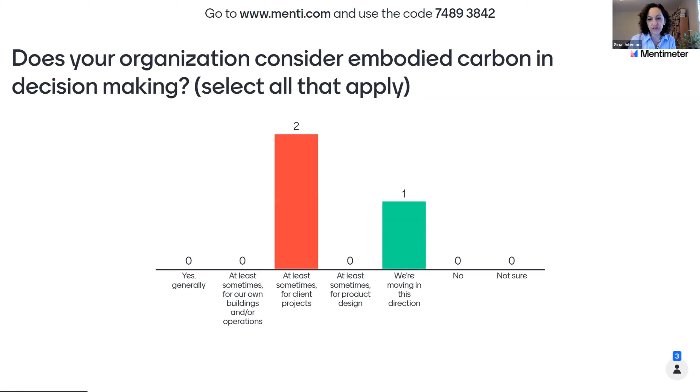So it looks like some of us are moving in this direction. Maybe some of you are in sectors where you have clients interested in doing this - really great to see that you're thinking about embodied carbon in these projects. Let's give a second for more responses. Thinking about it a little bit in your own buildings and operations. Not really thinking about it at all yet, maybe because of the nature of your organization, but we're hopefully going to give you more information to equip you today. That gives us a little bit of a sense.

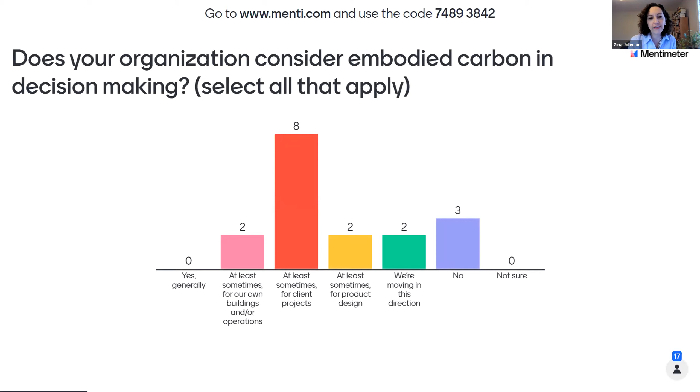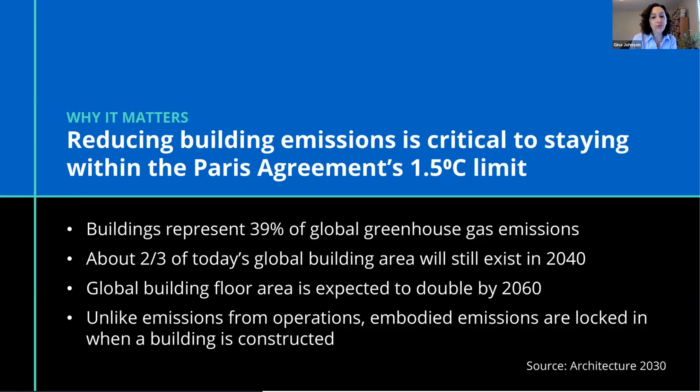Maybe they're working towards a science-based target or other carbon reduction goals, and so this embodied carbon discussion is central to that. We know low embodied carbon building is achievable through strategies like reuse, reduce, and sequester: reusing materials in buildings, reducing carbon through material optimization and specification of low carbon materials, and sequestering through the use of carbon sequestering materials.

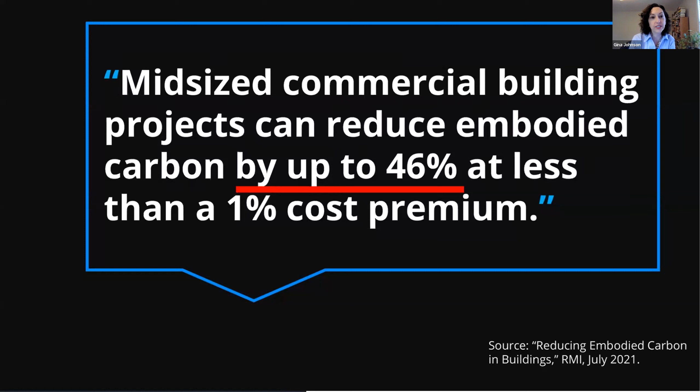A 2021 report by RMI demonstrated that we can reduce embodied carbon significantly at little to no additional upfront cost, using materials that are widely available today. RMI studied low cost and no cost strategies for reducing embodied carbon during the design and construction phases of three types of buildings, and found this finding.

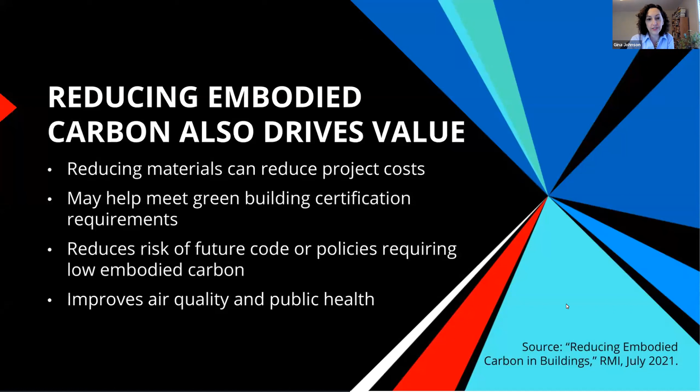Just last month, the White House announced a federal Buy Clean initiative. Many of you may have seen that. This aims to steer government funds for roads, bridges, buildings, military equipment, and other purchases toward low carbon products and materials. In doing so, the administration aims to reshape the market for these materials, driving innovation and investment in the private sector. This is a market that's already growing quickly.

The larger green building market is projected to reach $653 billion by 2028. And that's a compound annual growth rate of 10.5%.

Likewise, consumer product manufacturers see an opportunity for competitive advantage in reducing and labeling their products' carbon footprints. According to some recent consumer buying studies, adding a carbon label that showed a below average carbon footprint increased that product's sales, and by a lot if the product was also the cheapest. These studies showed that consumers were also willing to pay more for those products. In line with these findings, more companies are committing to carbon labeling. Companies like Logitech, Adidas, Panera, Allbirds, and Unilever, whose hundreds of brands include Dove soap, Lipton teas, and Ben & Jerry's, to name a few.

Businesses can also address embodied carbon by adopting corporate policies to complement existing carbon reduction strategies that they might have. In doing so, they signal to stakeholders that they're taking a comprehensive approach. Businesses that adopt embodied carbon policies are driving demand for lower carbon products, influencing supply chain practices, enhancing data monitoring and carbon reporting, and strengthening the transition to a decarbonized economy.

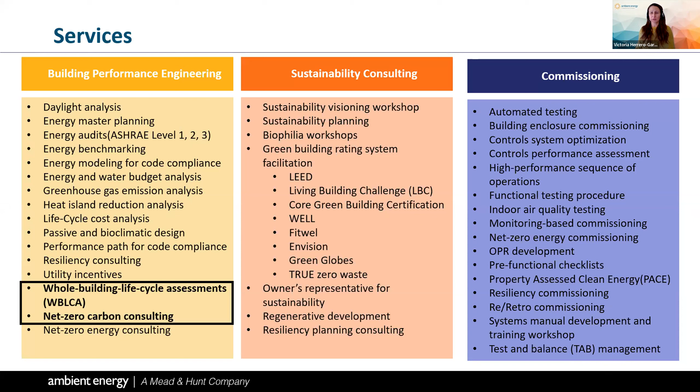Thank you very much, Beth. Hello, everyone. I'm going to cover some of what Gina already did with why embodied carbon is important, and then we will jump in like a little further conversation. Ambient Energy, the firm that I work for, is working towards a resilient and regenerative built world. And that is through education, collaboration, and all the different services that we provide. I have highlighted there the whole building life cycle assessment and the net zero carbon consulting, because that is the main purpose of this conversation today.

So what is the difference between operational carbon and embodied carbon? Many of you have heard throughout the years reductions in energy loads and operational carbon, and that happens when the building is already constructed. The embodied carbon differs from the operational carbon in the fact that every material used to construct that building is part of the embodied carbon of that building, and all the decision making happens beforehand. The embodied carbon will be there for life. It doesn't change after the operational carbon starts unless there are replacements.

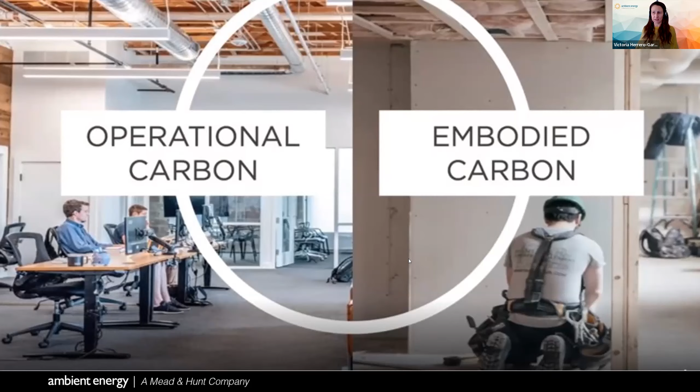Kind of like a little graphic of what embodied carbon entails, as Gina mentioned, is from extraction to the end of life of any product used in construction or in day-to-day life. My part of the presentation and Greg's will be more towards the built environment, but Jim will bring that perspective to the holistic embodied carbon world.

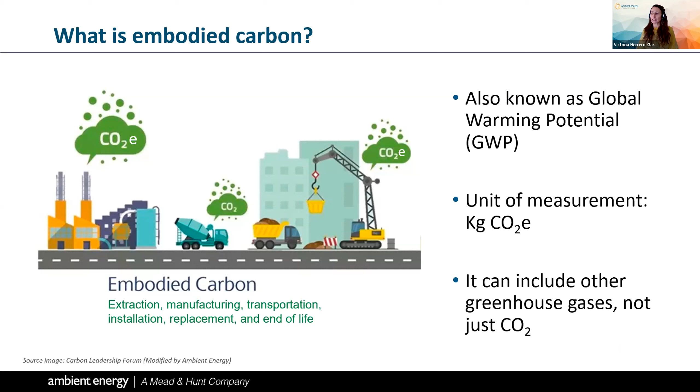The embodied carbon is also known as global warming potential. The unit of measure is kilograms of CO2 equivalent, and it can include other greenhouse gases, not just CO2.

Why is it important? This graph shows the breakdown of global emissions by sector. And if you can see, just building materials and other building manufacturing accounts for 21%. But when we also add up the rest of the manufacturing that is not related to buildings, we're counting 43%. It's not half, but it's close to half of what we consume and use on a daily basis.

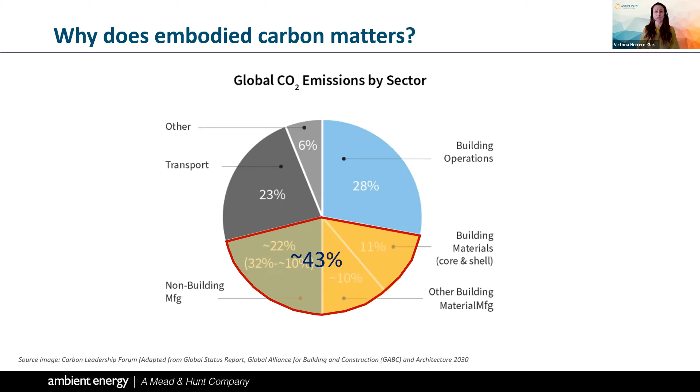As Gina mentioned as well, by 2060 it's estimated that the world is going to be building approximately one New York City each month. That is for the next 38 years and 9 months, 465 New York Cities.

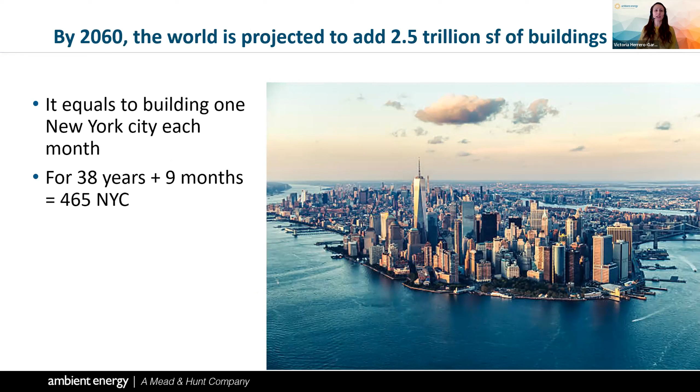The difference between operating versus embodied carbon, and why it's important, is that if we do a building as usual, normally operational carbon will be the biggest chunk of that pie, and embodied carbon will be the smallest. But as we go towards a high performance building and the electrification of the grid, embodied carbon starts to play a big role.

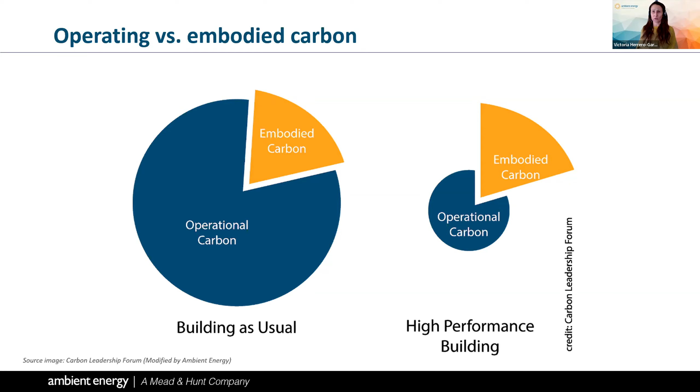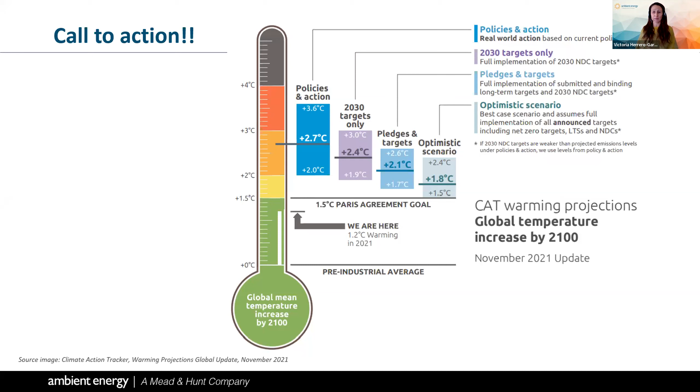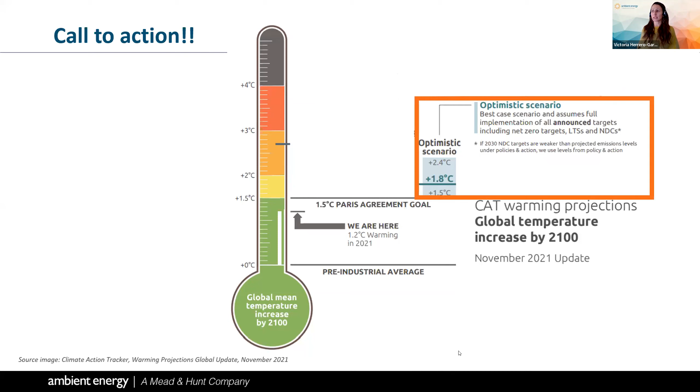Also related to climate change, and how we are tracking for not exceeding the Paris Agreement goal. This graph has a lot of information - you can read more of that in the Climate Action Tracker report. But I want you to think about this: even with the most optimistic scenario, we need to make sure we are focusing our efforts on big target reductions in order to meet it. So how does embodied carbon policy play into this?

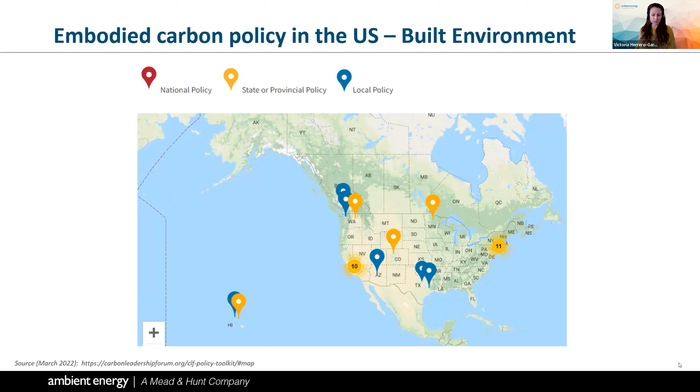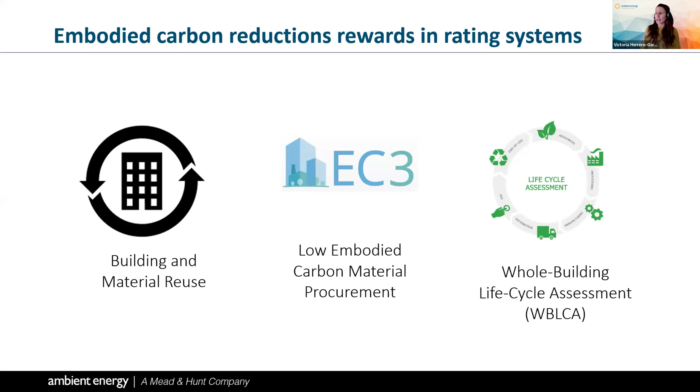There are a lot of state and local policies that are being created and developed every day. This is on the Carbon Leadership Forum's website - you can find more information about the policies there. Other people are motivated by rating systems, and they reward us for building and material reuse. Other credits and points are for low embodied carbon material procurement, and others for whole building life cycle assessment.

But how do we do this? We cannot reduce what we cannot measure, so we need to understand where the biggest impacts are in order to reduce them. There are two ways to measure the impacts: one is the procurement of low carbon materials, and the other is the whole building life cycle assessment.

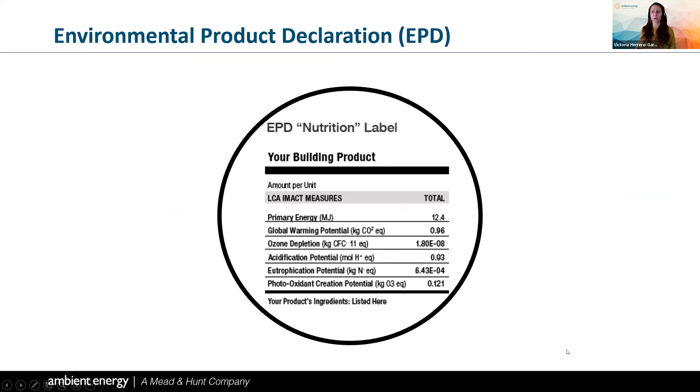With the procurement of low carbon materials - let me see where it doesn't pass - the first terminology we need to know is environmental product declarations. Jim is going to cover more of this in detail, but it's pretty much a nutritional label for our products. It gives us a lot of different parameters, but one we want to look at is the global warming potential, which is the embodied carbon of our product.

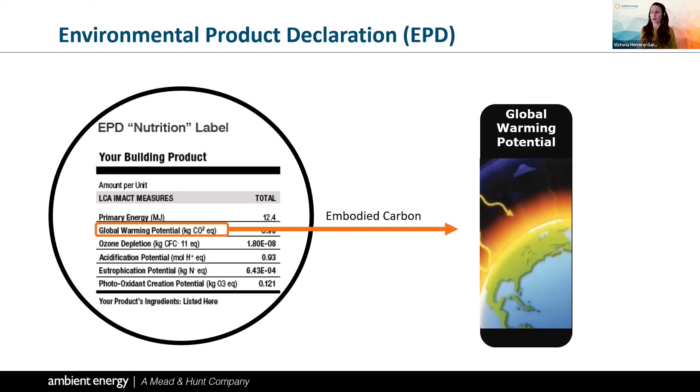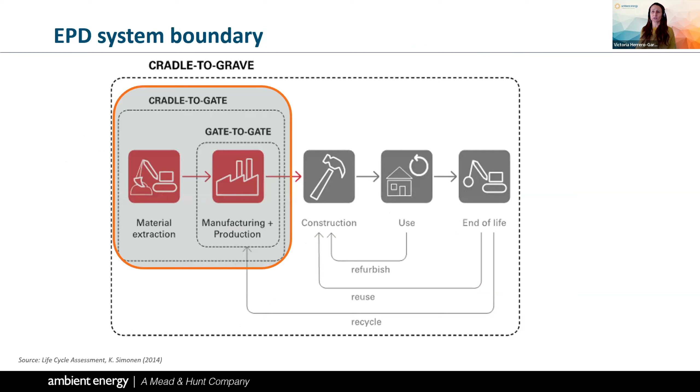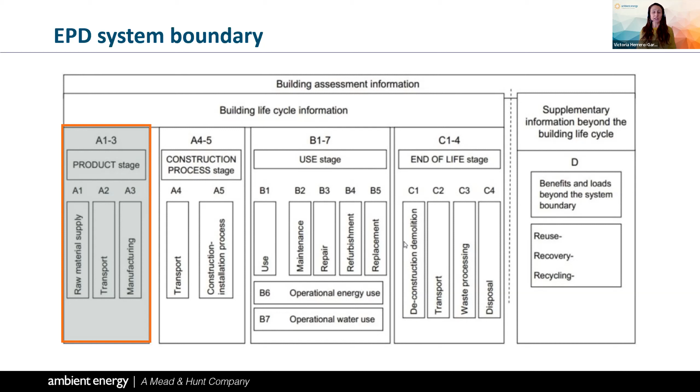Many of you have heard the system boundary, cradle to gate. That means from material extraction to manufacturing, to when it leaves the gate of your manufacturing process. Some of you might have also heard of life cycle stages - for the EPD it's normally A1 through A3. Some products might have other system boundaries and other life cycle stages included, but for the most part these are the ones. This is a graphic showing the life cycle stages, and for the EPD, again, it's modules A1 through A3.

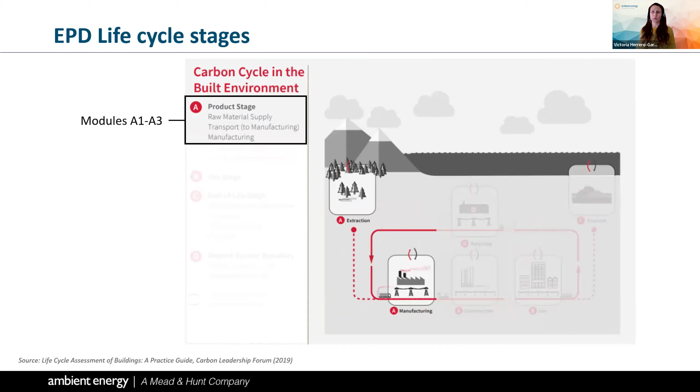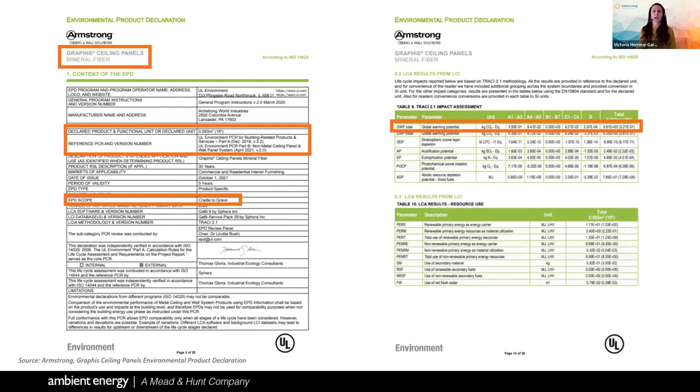This is an example of an EPD. It has a lot of information - the scope, the unit, the declared or functional unit, the global warming potential reporting. So it gets very challenging sometimes to compare and see which product is better than another.

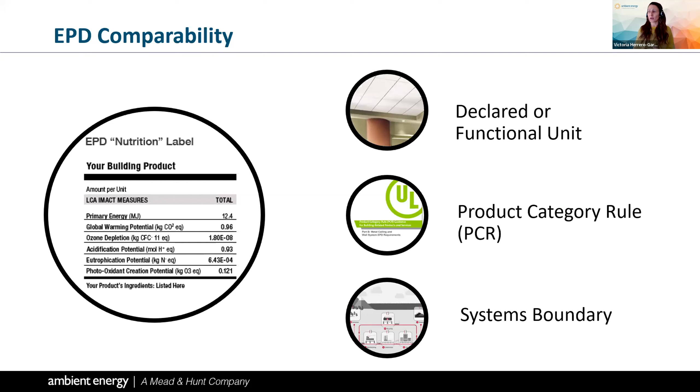The three things you normally need to look into to compare products: the same declared or functional unit, the same product category rule, and the same system boundary. To put it in an easy perspective, there are some free available tools out there that use the system boundary A1 through A3 and have done all this research for you.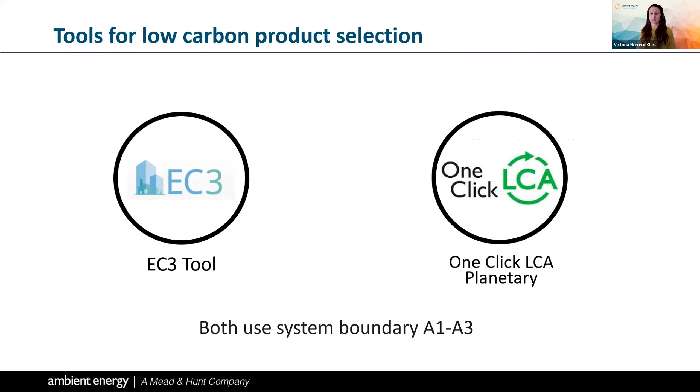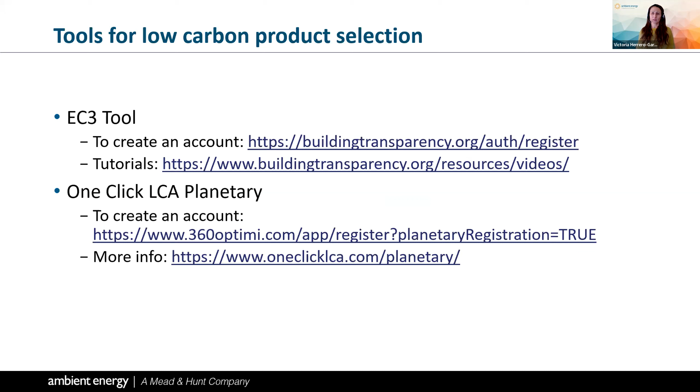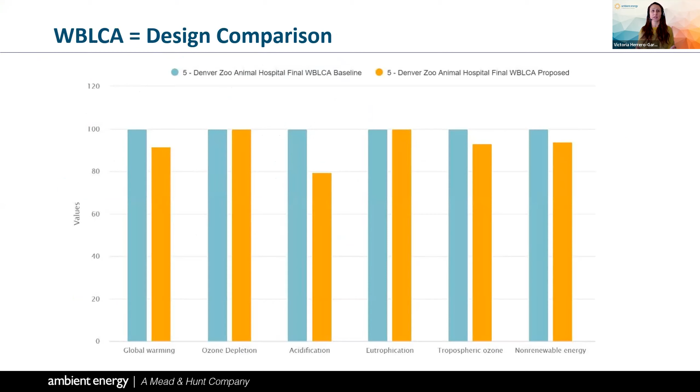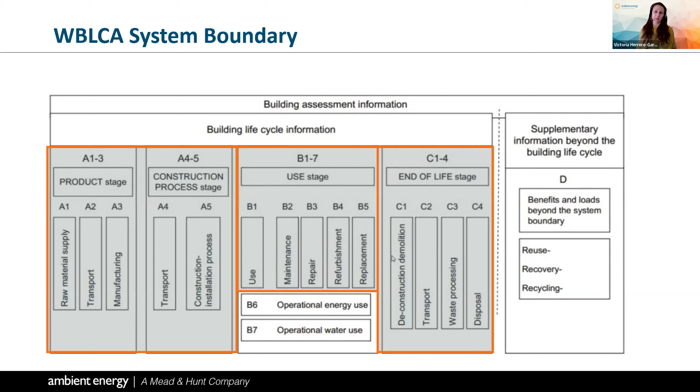And then the whole building life cycle assessment. This goes a little bit beyond the A1 to A3 stages and the system boundary. This is a comparison of a baseline against a proposed design case, and includes a system boundary that is cradle to grave, meaning life cycle stages A1 through C4, from material extraction to disposal.

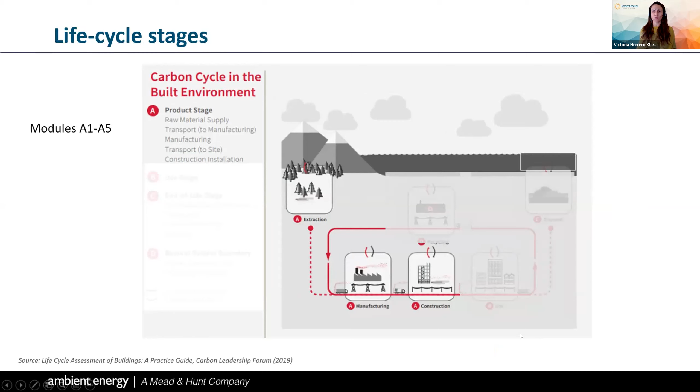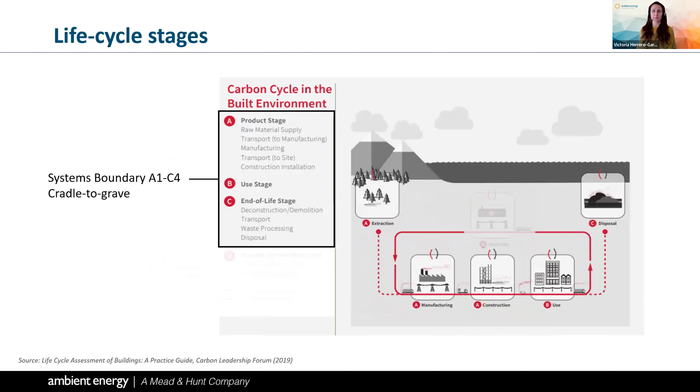The life cycle stages are here again: modules A1 through A5, which now includes transportation and construction installation, the use stage, and the end of life. So the system boundary is cradle to grave, A1 through C4.

And then Victoria, just a quick time check.

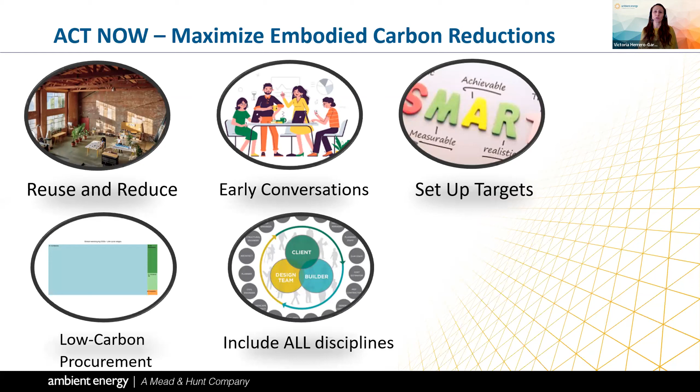You can take action to sign in for commitments. There's an Owner's Commitment specific to owners, Structural Engineers SE 2050, MEP 2040, the net zero carbon building commitments, and also a Contractor's Commitment Guide which includes different categories, with category one relating to embodied carbon: maximize embodied carbon reductions by reuse and reduce, early conversations, setting up targets, low carbon procurement, and including all disciplines in the conversations.

So just open your eyes, the tools are out there, just start the conversations as soon as you can. Thank you very much.

Great, thank you so much, Victoria. That was awesome. And we have some questions coming in, so we're going to wait for those when we convene the panel. But it seems like it's really generated some interest, so that's great. Thank you very much, great job.

We'll switch to Greg. Greg Kingsley is President and CEO of KL&A Engineers and Builders. KL&A is known for vertically integrated services from design through construction. Greg's current passion is for innovative wood solutions and the rapidly growing field of mass timber construction, which he considers the best hope for advancing the environmental responsibility of structural engineering through carbon sequestration. So Greg, take it away.

Thank you, Beth. And thanks everyone for listening.

Victoria and I often present together, and she's talked about processes and systems, and I'm going to move on to the next step, which is really about the value proposition. What does all this cost? Anyone who's been involved in these systems or this process knows that the first questions that come up really center around what's this all going to cost me?

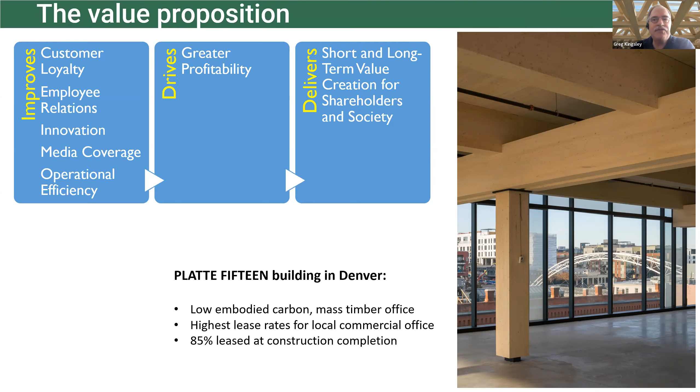And it was 85% leased at the time that they got their certificate of occupancy, which was during the pandemic. So some really strong evidence that it can bring value. And the owner of that building is actually building another one right across the street to prove that it really worked for them.

Another example is the Microsoft campus, where they basically said that just by asking suppliers for lower carbon options, they were able to procure materials that met their reduction targets and performance at zero cost premium. So it doesn't always cost more.

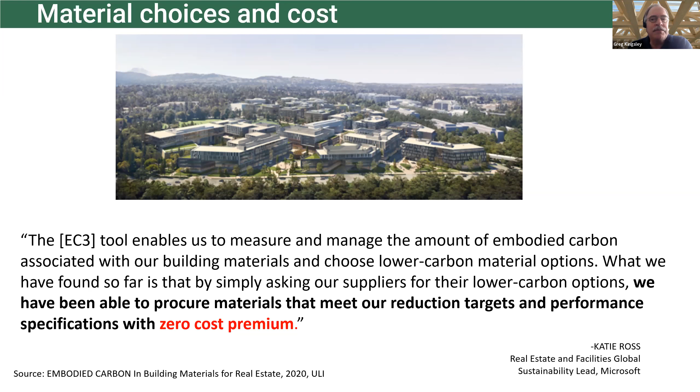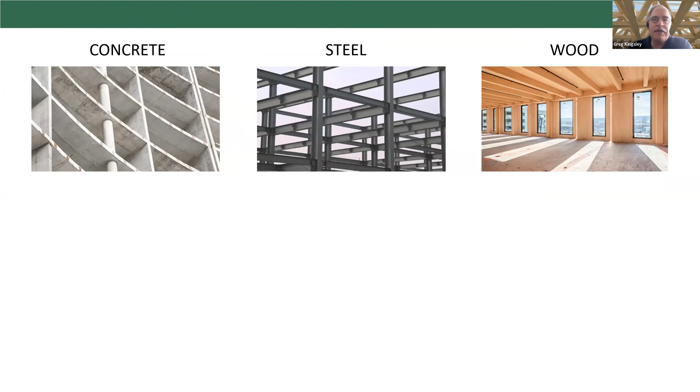Let's talk about the different building materials. As Victoria said, I'm kind of focused on the built environment and buildings, and hopefully that's okay. We as structural engineers work mostly in concrete, steel, and timber.

If I start out with embodied carbon goals, I want to lower the GWP of a concrete building. The main thing I'm going to do is reduce the cement volume. I'm going to increase what they call supplemental cementitious materials, like fly ash, again trying to replace cement, which is where most of the GWP resides. And all of those moves are going to lower the GWP, and they're also going to lower the cost.

If I'm designing a steel structure and I want to lower the GWP, I'm going to basically reduce the steel tonnage and try to increase the amount of reused or recycled material that I'm using. And those changes may or may not increase or decrease the cost. It's really kind of hard to tell in a generic sense.

One of the better but more challenging building types is mass timber, which I'm really taken with building now. I can dramatically lower the global warming potential and sequester carbon in the process of building a timber building. But as I do that, the more wood I use, the better it gets and the more it costs. So there's an inverse relationship between the embodied carbon goal and the cost.

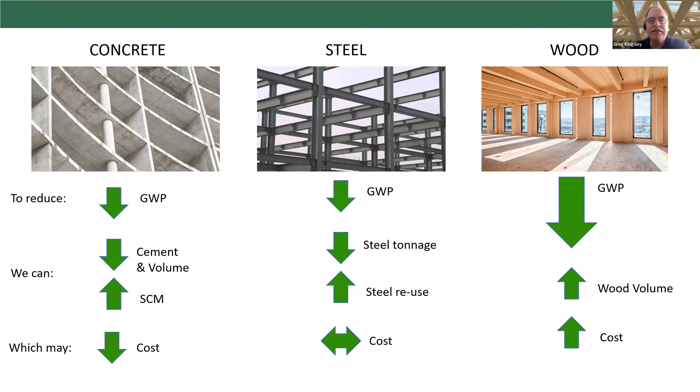So with that in mind, I want to focus on mass timber buildings for the moment as the most challenging, I think, of these imperatives. And let me start with just a quick description of where the value lies in mass timber buildings. I always say it comes down to three things.

First, mass timber buildings are sustainable. They're the only true renewable building material. That's kind of where we're starting and what this talk is about. But what most people want is a building that looks great and feels great, has biophilic properties, and that tends to be, for my clients, mostly what they're looking for. The other dramatic benefit is that it builds very quickly, very quietly, with very little site waste. So those are the three big values.

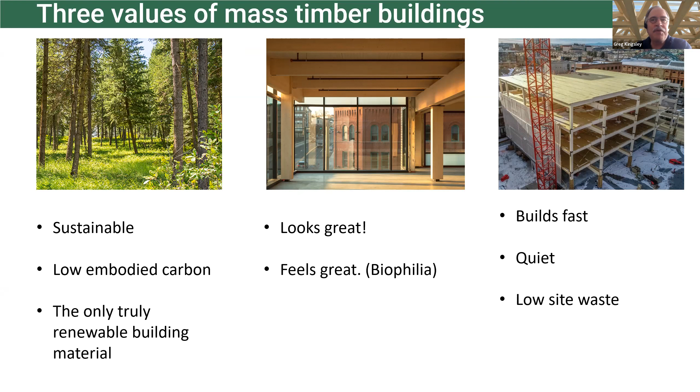So quick introduction to the building. It's downtown Denver, at the corner of Platte and 15th, just like the name. It's got 3 stories of mass timber above 2 stories of concrete podium and below-grade parking on a 30 by 30 office grid. And you can see the timber structure behind there.

And what we did for ThinkWood was to take our mass timber building as constructed, and also a steel and concrete building built on an identical size and grid, and do comparisons in terms of global warming potential and cost. Just to be clear, we looked at this two different ways. The global warming potential of this building turns out to be entirely dominated by all the concrete that's below grade. So we look at the numbers for the whole building, but I also took the liberty of looking at the numbers for the building that is just above grade, that's mostly timber, because I thought that was interesting as well. But we show both of those in this study.

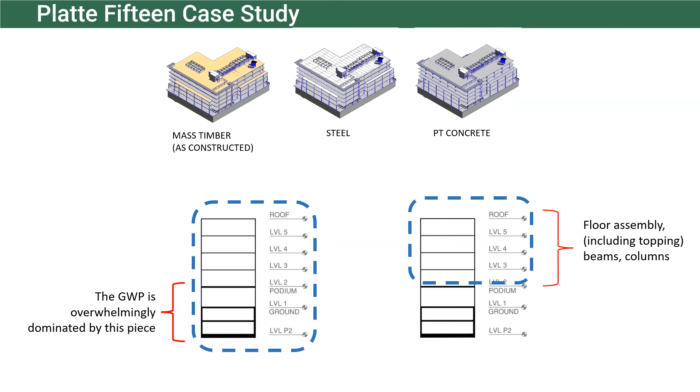Hey Greg, before you leave this slide, there's a question that came in that I think might be really helpful before you get too far. For somebody that maybe hasn't really heard of mass timber, could you just explain what mass timber is and how it's different from how people might think of wood in general?

Yeah, absolutely. I'm looking for a quick picture. So this shows you mass timber structure. Really, it's like what you would think of traditionally as heavy timber structure, of which you can see a lot around Pittsburgh and the East Coast.

A lot of old industrial buildings are this way. The thing that makes mass timber really work is that the elements are big enough that they have an inherent fire rating, like a thick log does in timber. This is a scientifically proven system: you subject this to fire, and it basically develops a char layer, and it has its own inherent fire rating. That's really the defining factor.

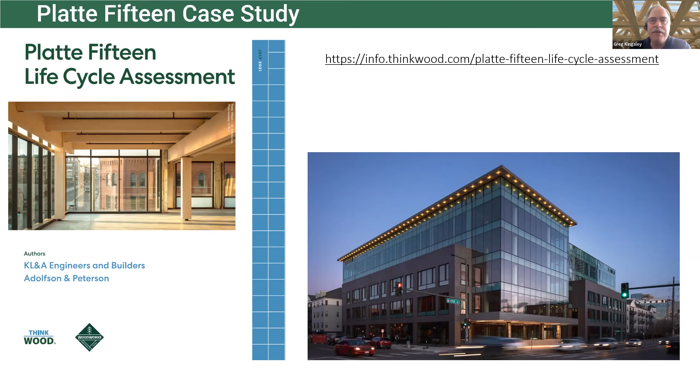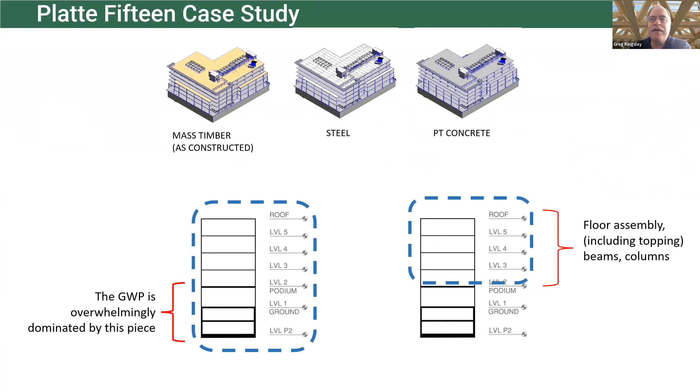And it's all made of little pieces of timber. Every piece of wood in here is actually built up of a bunch of connected or glued together 1x2s. So we're not cutting down old redwood trees or massive forests. It actually comes from 6 and 9 inch diameter trees. Hopefully that's a clear enough designation. Sorry, I jumped into my own vocabulary there, my jargon.

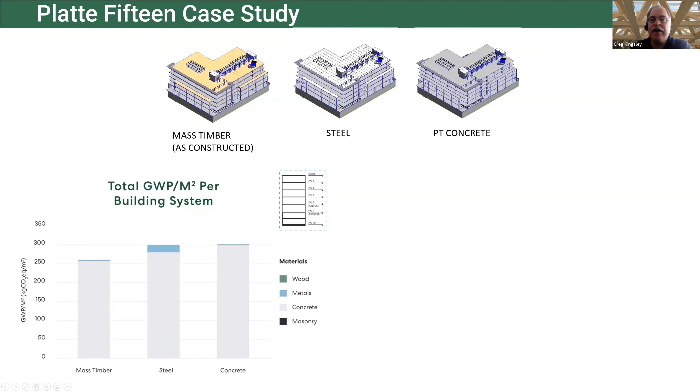But if I look just above grade, as if I had a structure that was all timber structure above, here I have a pretty dramatic improvement. I go from a GWP somewhere in the 35 range up to 110 for steel and over 140 for concrete. Again, still dominated by concrete — that's just the concrete topping on the floors.

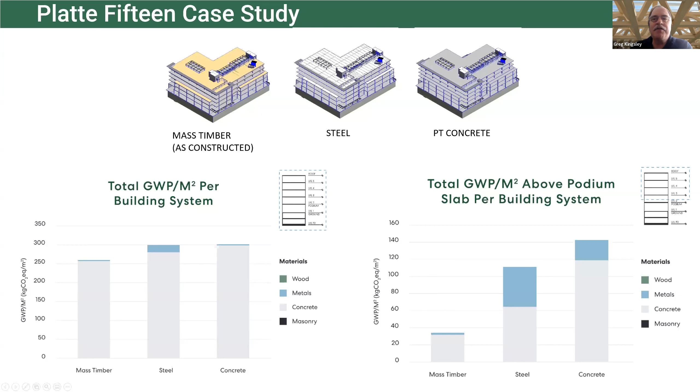Then the question is, what did all this cost actually? If we compare the cost of these different buildings — in the market we were comparing, a couple of years ago — the steel building ended up at the top of the heap, it was the cheapest one. Concrete was about a 3.25% premium. Timber was a massive 8% premium of the structure over the steel.

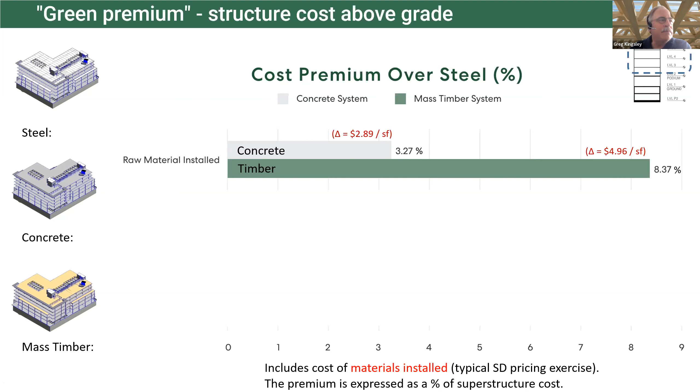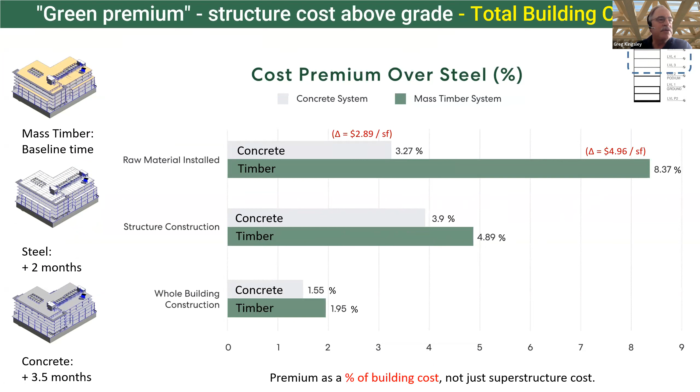This is where I tell people that mass timber buildings kind of go to die, because they look at these initial numbers. But then we asked, how quickly can we build this building? And it turns out the mass timber building is the winner — it can be built 2 months faster than the steel building and 3.5 months faster than the concrete building. If I fold that into my cost analysis, it cuts that premium not quite in half. And if I look further at the whole building construction, instead of just the structural pieces, it's down to a little less than 2% premium.

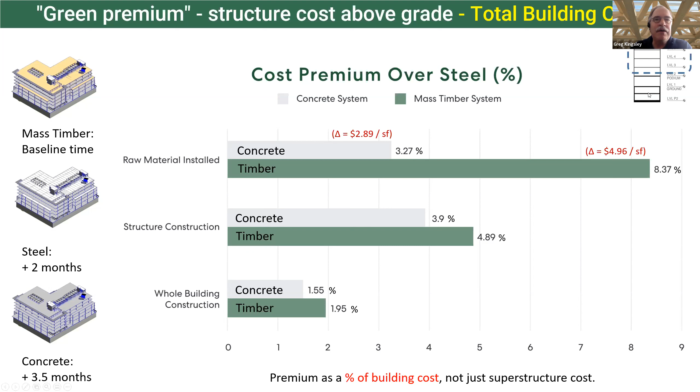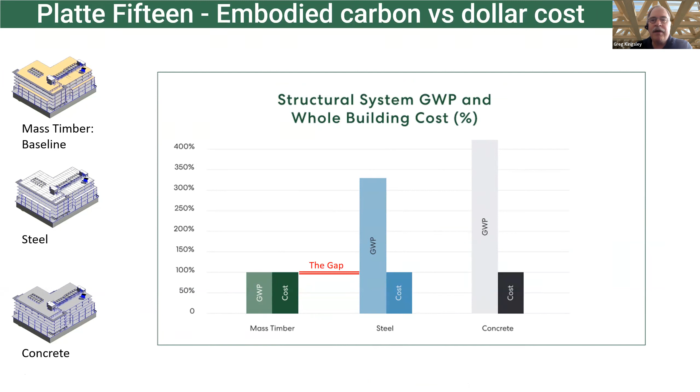So there is a premium, a green premium for this building, but it's not very much — not as much as people originally thought. If I look at that on a different graph, now I look at mass timber as 100% in terms of GWP and cost and compare the other buildings to that: steel is 325% more GWP, and concrete more than 400% more global warming potential. Cost on this scale looks the same, but I just want to emphasize that 2% I talked about was still in there. There are ways to close that gap.

An interesting one I'll throw out to you guys is a company just coming out of their beta period called Aria's Earth. They work to get premiums to building owners, project by project, for making embodied carbon decisions that sequester carbon. For this building, in their early analysis, they thought they could make a credit of $155,000. Now I think it would be double that, but it's not enough to close the gap — but it's something.

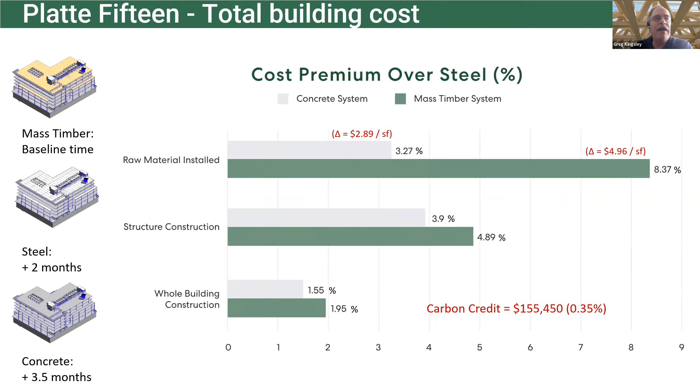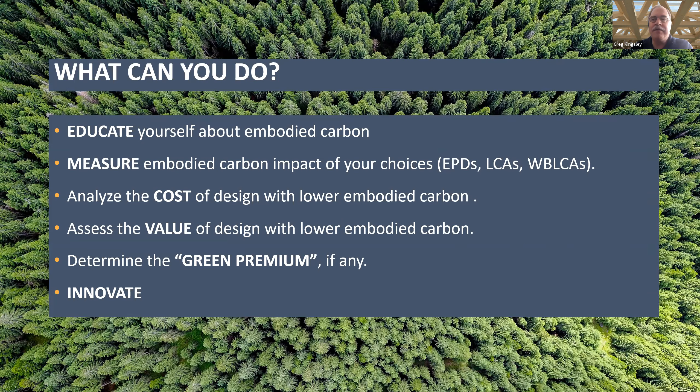And with that, I just want to end up kind of like Victoria did and talk a little about what you can do and what we've done in our practice: educate yourself, learn how to measure — as Victoria talked about, this is the key point. Learn the measurement, then learn what the cost premiums are or non-premiums, and certainly innovate. I'll end again also with a mantra saying our rule 1 at KL&A is start now, no time for rehearsal. So please just do that.

And appreciate you taking time out to go back and explain. That was probably one of the best definitions of what constitutes mass timber and how it's unique that I've heard. So thank you for doing that.

Let's flip over to Jim Mellentine. Jim is a consultant who supports companies, industry associations, and government agencies with their corporate sustainability challenges. Jim teaches graduate design students about life cycle assessment and the circular economy at Thomas Jefferson University, which I think, unless I'm mistaken, is in New Jersey. Is it not, or somewhere on the East Coast? Jim, we'll turn it over to you.

Yep, that's in Philadelphia. So, and now I'm in Colorado. So thank you again for having me. I appreciate it.

As Victoria and Greg mentioned, life cycle assessments are a key input to measuring embodied carbon. So just as a refresher, what I'm going to talk about here is geared towards both manufacturers trying to reduce the embodied carbon of their products, but also customers of these products, to help you understand what goes into measuring that metric and maybe change your expectations on what your suppliers might be able to do with this information. So, a reminder: a life cycle assessment, or LCA, is the input to the environmental product declaration, or EPD, that is commonly used to communicate the embodied carbon metric.

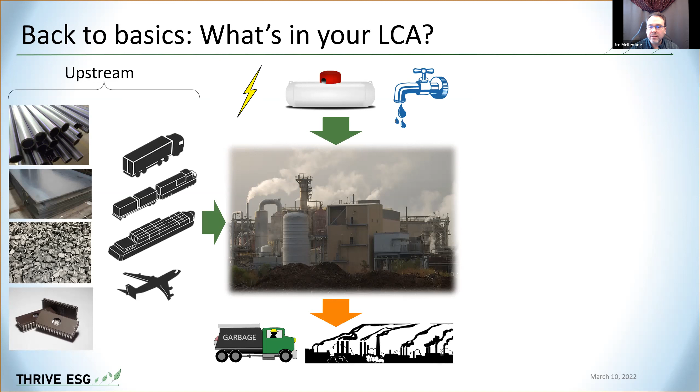At your facility itself, you're generating waste, you're generating emissions, and again there's some impact that goes along with that. And then what comes out of your facility is a product. The life cycle story doesn't stop there—you also have downstream processes.

There's typically some distribution that happens, and that's different for every company. Maybe your product requires installation, maybe not, but then the product is used for a certain period of time, and depending on the nature of the product, those use stage impacts can vary significantly. For example, a product that uses electricity during its lifetime would have more impact than one that just sits in a building, essentially inert except for the function it's providing over that time frame.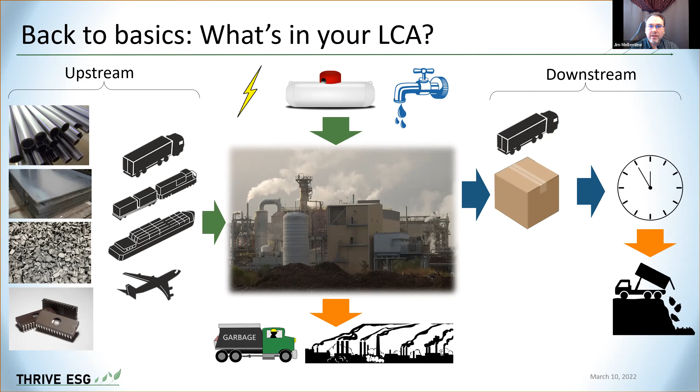But inevitably all products have an end of life, whether that means going to a landfill, being recycled, or reused—all of that is considered in a life cycle assessment. The point of saying all that is that you have data if you've done a life cycle assessment. Within the inventory, you have quantified inputs and outputs for each stage in that product's life.

There's a good chance you also have unallocated quantities for the facilities where that product is made. So if you have one or more facilities, you have information available on what's going in and out of that facility. This table is a generic example—actually the same one I use in the course I teach, that I give to my students as an example of what a life cycle inventory might look like.

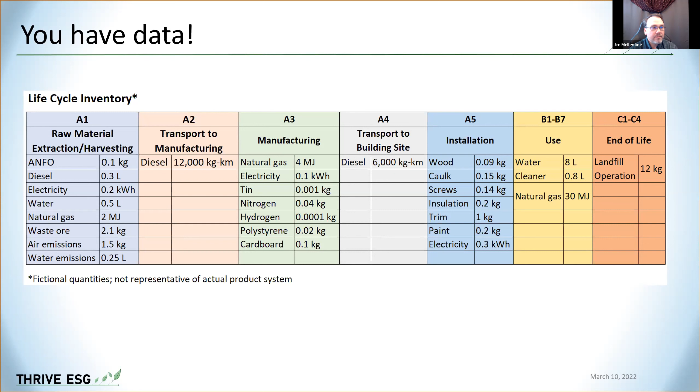Across the top I have different life cycle stages: raw material extraction and harvesting, transport, the actual manufacturing, more transport, installation, use, and end of life. For each of those, I've put in some materials and quantities that might be considered inputs and outputs at those stages. So this is an example of data that you have available.

But it's not just that—here's an example of life cycle assessment results you'll typically see in an EPD. A breakdown like this has different impacts across the bottom, and the one we're focusing on today is GWP, or embodied carbon. The different colors indicate different life cycle stages. In this case, you can see that upstream raw material extraction and harvesting contributes the most to the embodied carbon of whatever this product is.

Here's another way you typically see these results—you can dig even deeper into a more detailed breakdown and see what specific materials or energy sources are contributing to the impacts. There are more colors here, with individual materials and energy sources indicated, so you can see how all these different things contribute to the embodied carbon of this product. By the way, these are both from a published environmental product declaration for Nucor hot rolled steel that you can find on the UL website below.

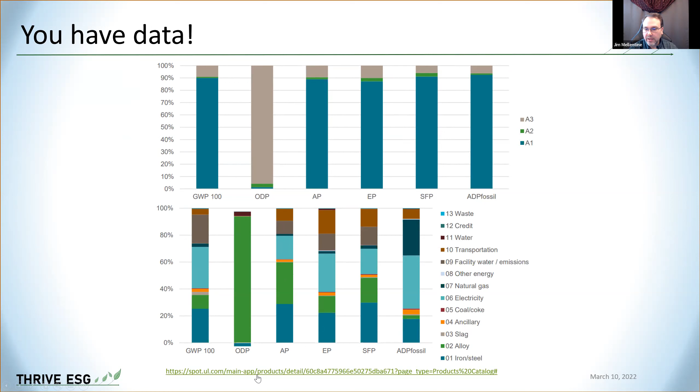So what's the message? Well, EPDs are valuable, as Victoria and Greg have already explained. They can provide good information and help reduce our society's and global warming footprint. But I see this way too much: if you put your LCA study on a shelf for 5 years until it's time to renew the EPD, you've really wasted part of your investment and you get a frowny face. I know more companies are changing how they use their data, and I'm glad to see that, but not enough are doing this.

So I've listed here some things you can use this information to do, essentially realizing more value from the study you've already done and the money you've already invested. You can use this information to inform the product development process if you're a manufacturer, to model alternative materials, energy sources, logistics, the use profile of your product, different packaging options, and other things as well.

And you don't have to be a life cycle expert to do this. If your team doesn't have that expertise, you can make it easy and just use metrics based on life cycle thinking to develop a product development scorecard where you can gauge where the different products in your portfolio fall within the spectrum of sustainability you've established.

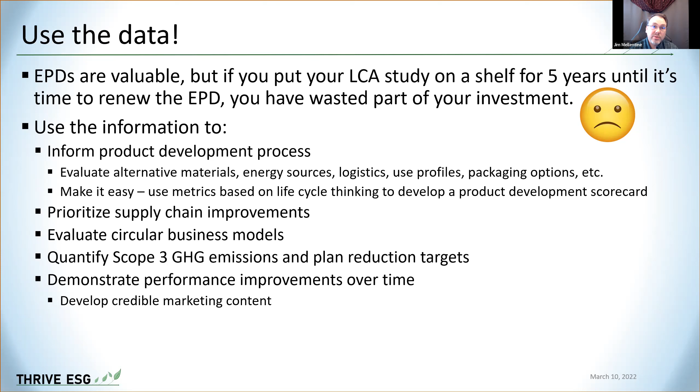And of course, you can establish a baseline and demonstrate performance improvements over time, and use that information to develop credible marketing content that you can use in many venues besides just an EPD. And then you get a happy face.

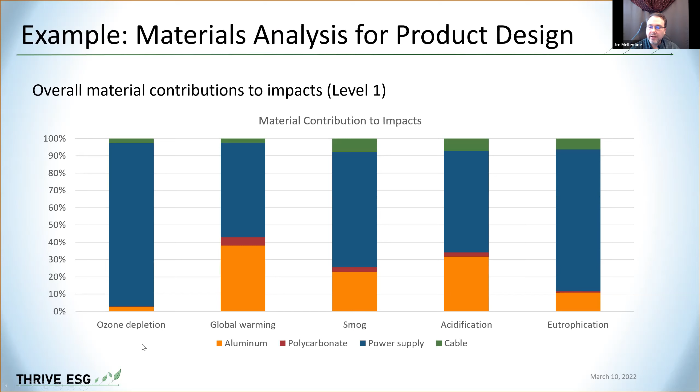Okay, all right, I'll try to zip through these examples. Here's an example where I developed a material analysis for product design, a really high level analysis on some different materials that were going into a product: aluminum, polycarbonate, power supply, and a cable, so they could see those impacts.

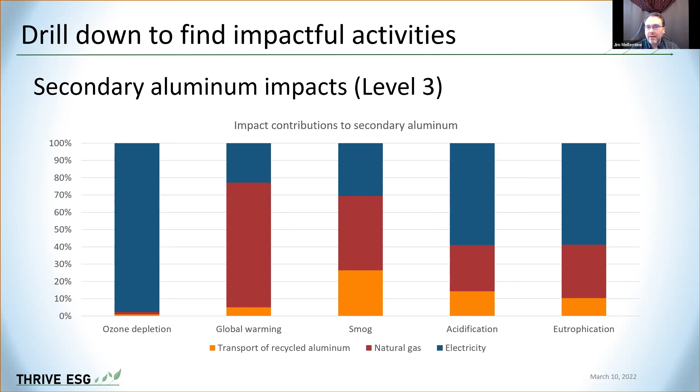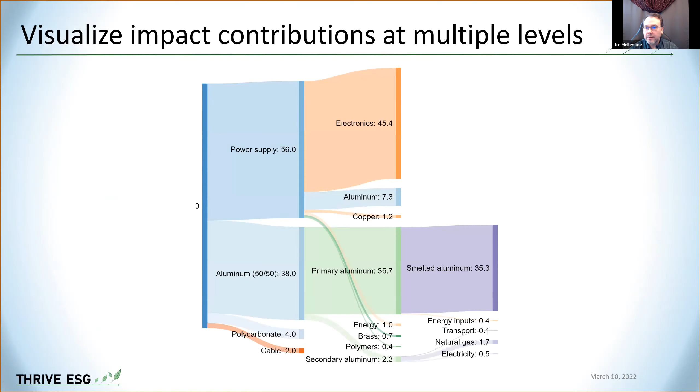But you could also dig in further and look at impacts for a specific material, in this case recycled aluminum. You can also visualize it in different ways. Here's a Sankey diagram showing all those different levels combined together. This is the type of information you can get from a life cycle assessment model, so you can see where the actual impacts are coming from and trace those upstream in the supply chain.

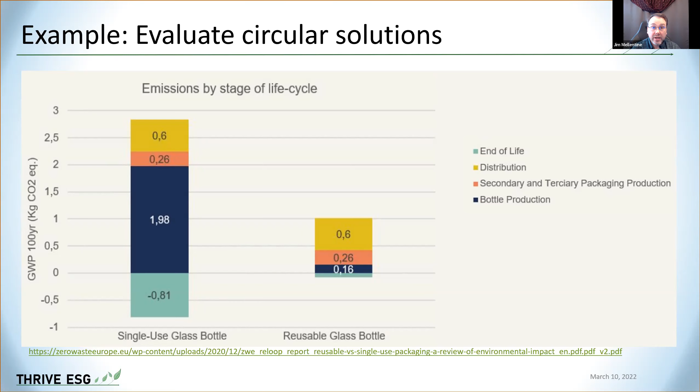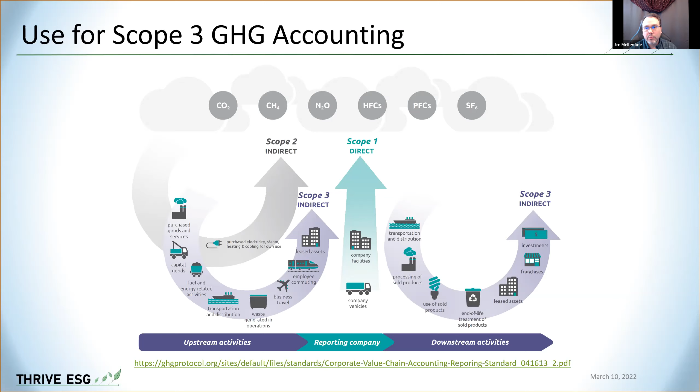Why does Apple do this? It's not complying with any laws. Most LCA activity is driven by customer requests. It's voluntary, but it also helps your brand reputation with an appeal to a growing segment of the population who use environmental responsibility as an input to purchase decisions. Like I said before, you can also demonstrate improvements over time.

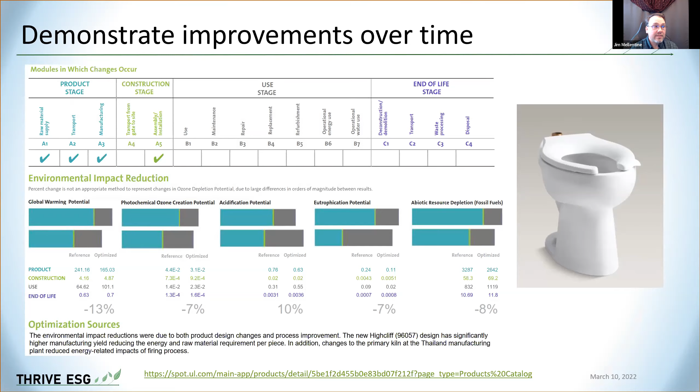So in summary, your LCA has lots of useful data, so you should use it. Maximize the value of your LCA beyond an EPD. Improve your product development process, make supply chain improvements, investigate different circular business models, improve your scope 3 greenhouse gas accounting, and improve your marketing and communications.

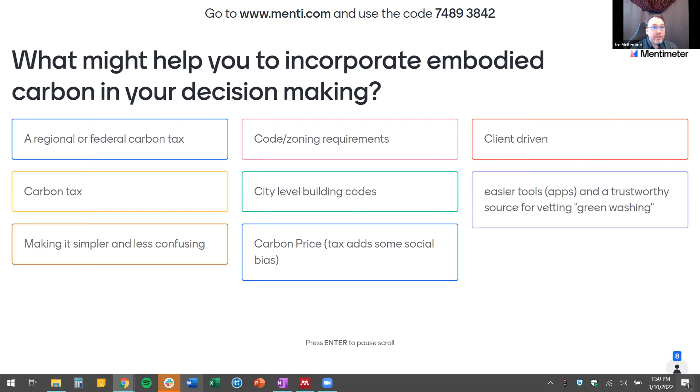If you're reusing that building, that's a great first step in reducing embodied carbon impacts, because you don't have to, in most cases, rebuild the structure. Maybe you're augmenting it in some way, but for the most part, you're focused on the other materials, the finishes and furnishings of that space. So you can still use the same information for that focus. There are lots of environmental product declarations out there for those types of products, and I would say you can use the same strategies for that.